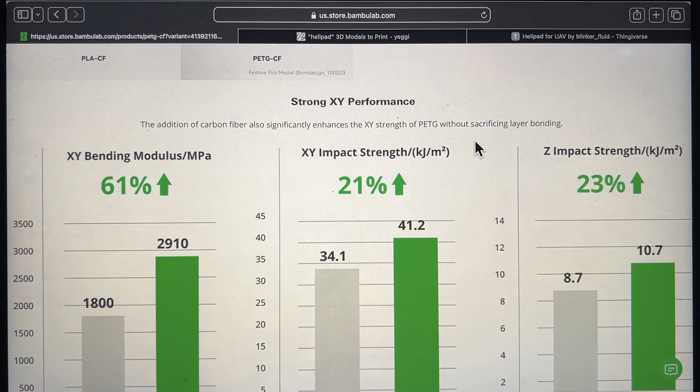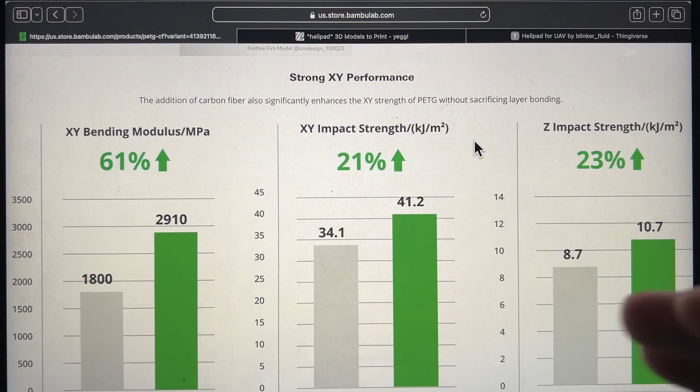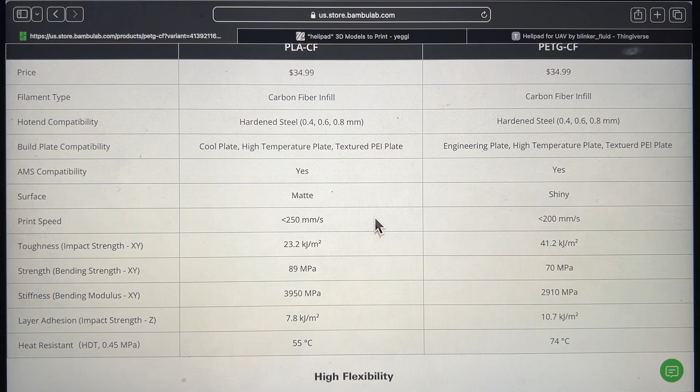So this part right here, they're just telling you the difference between PLA, carbon fiber, and PETG. You can see right here, PLA does have better strength in the XY than PETG. This is even better, but I was more focused on the layer adhesion strength - impact strength is higher here, and the heat resistance is higher. So that was pretty much my deciding factor, because if you leave PLA in the car it will melt even with carbon fiber, or will deform, and PETG has a higher temperature tolerance.

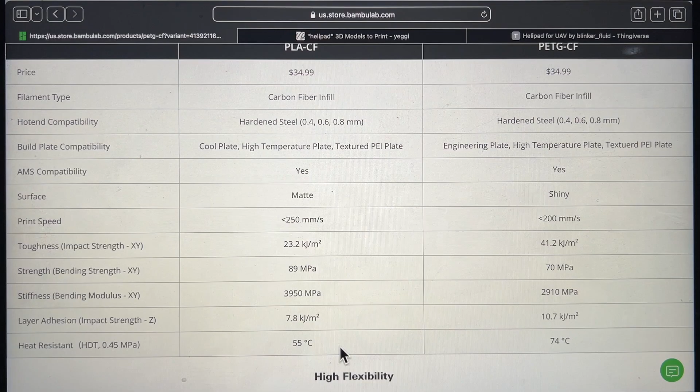And depending on your climate, it's going to dictate what kind of filament you're going to use.

Carbon fiber is very hygroscopic, so it does absorb water, and that will degrade the strength of your print if you do not get that water out. So use a dryer or an oven, or you can use a 3D printer that has a dryer like Bambu does. You can pretty much put it in the oven itself and just dry it out.

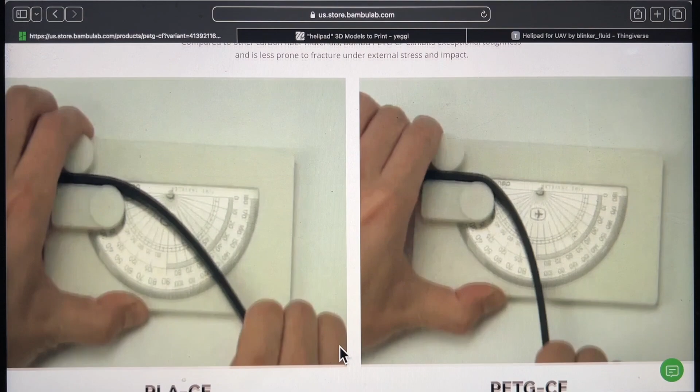So this is just testing the flexibility that they do, shows that right there. The requirements are hardened steel, that's what Bambu recommends. So you can do different types of millimeter nozzles. Here's their colors, and the RFID - this is actually really, I like this idea.

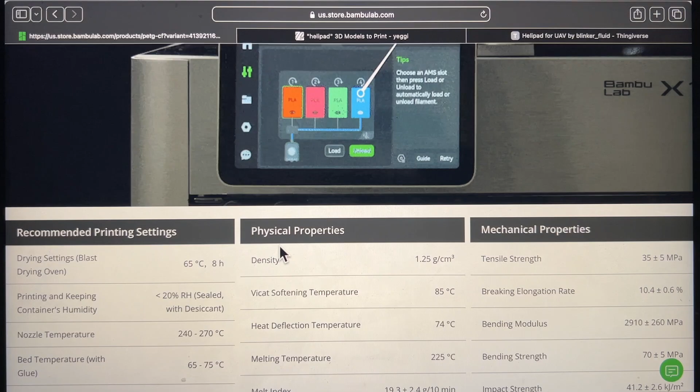I hope other companies do this, but this actually pretty much gives you all the information of that filament, and it gives you the pre-settings that they test in the facility that gave them a lot of successful prints. You can always tweak those settings for your own setup, so just keep that in mind. It's just a good starting base, which will give you a high success rate in a lot of your prints, and you don't have to try to figure out what's going on with the heat, flow rate, and all that.

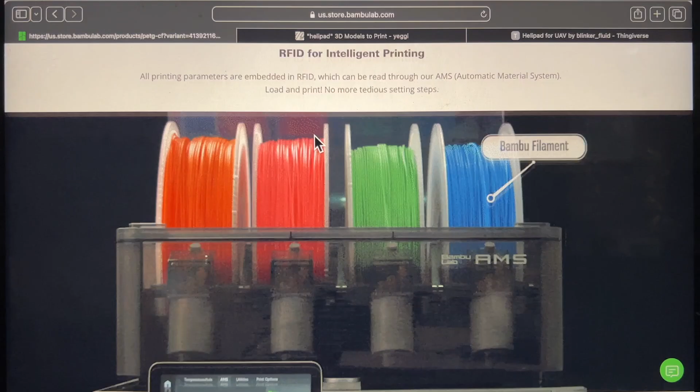Like I said earlier, you got to dry it, watch the temperature range, and print speeds, and this is all fed into that RFID. But for me, I tweaked it a little bit on my slicer. So without further ado, let's go to the slicer, and we'll send this print to the printer.

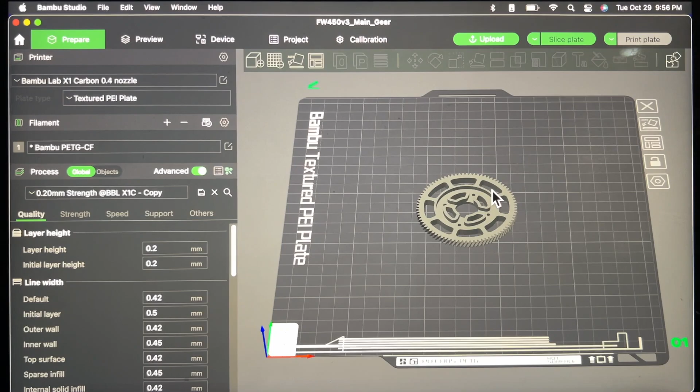Okay, so we are in the slicer. I'm not going to go fully in detail on this - there are other people out there that have explained this whole program better than I ever could, so I will defer to that. I'm just going to show you what kind of settings I like to use. These are just my personal preference.

So when you upload the file, that's for free. It does have a lot of parameters already set for you, and it gives a description of what you need to do if your printer doesn't fill that information in.

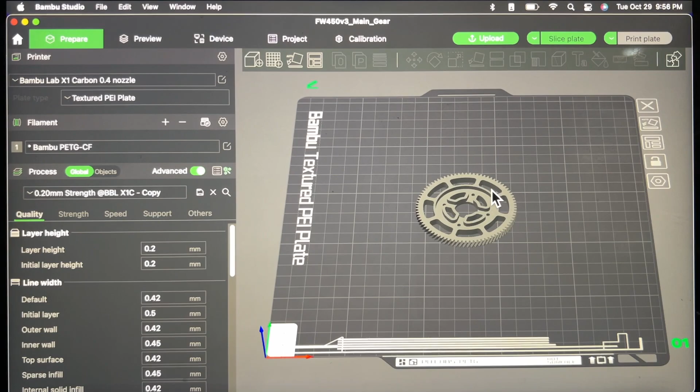One of the requirements is to do the strength, the infill. So we go to strength - your infill density is how much is pretty much being printed inside. I'm going to slice and show you. He says 50%, so that's where I'm going to start, is 50%. The higher the infill density is, the stronger your material is going to be.

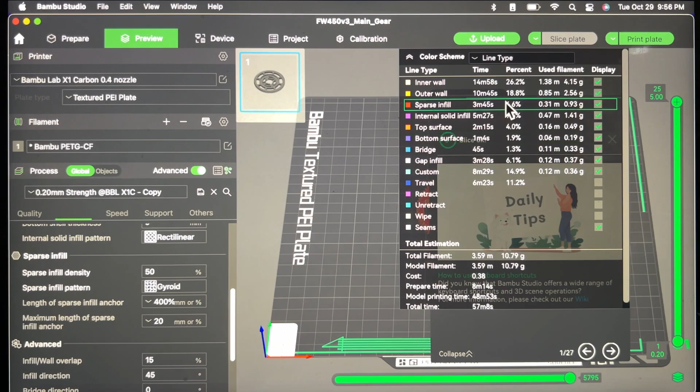Usually in the 3D print world, we don't really go above 15 to 20, because most prints already have a lot of strength. So if I slice it and zoom in, this is the infill right here - this is what's going to give it strength.

Also your pattern is going to make a difference. Usually they have this rectilinear pattern. I like gyroid because it's used for things like printing brakes and all that stuff, and it has increased strength, but it also does a good job at reducing heat. So that's what I like about gyroid.

I have never had an issue with it. In all my print files, I always select this. I think it's just great. Now, that's just personal preference - you may have a different one, so it's totally up to you.

Now the wall thickness - usually the default is 2. I just bump it up to 3, and that's just your outer wall, and it kind of gives this part a little bit more strength, because I don't want it to break off if it's weak. So that's why I increase this.

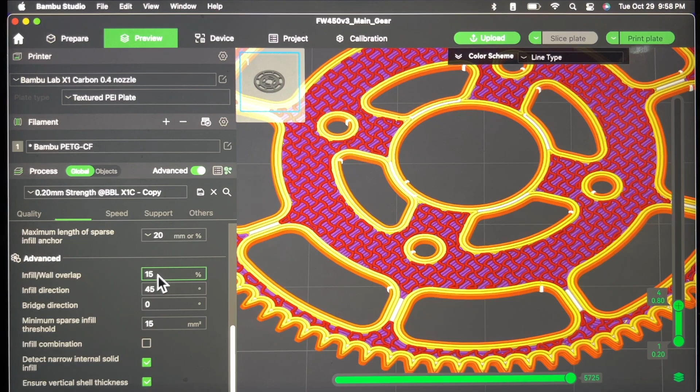And that is pretty much it, that's pretty much what I've changed. The speed, the RFID is going to determine that, but me personally, I just reduce every speed down. I think I was basing that off of ASA, because with ASA you kind of want to print slowly, and it doesn't hurt. So just keep that in mind.

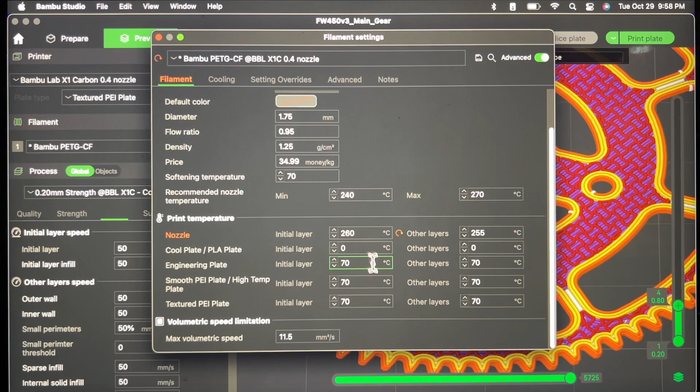Since it is a Bambu filament with that RFID chip, it reads everything - it has your flow rate, tells you your diameter, nozzle temperature, cooling, cool plate, all of the information you need. This I'm not going to mess with. Your fan is at 0, so it knows it doesn't need to cool this off, and that's what I want.

Okay, so when that's all said and done, you got all your settings. You just go to print, and then you have your printer, and then you just say, hey, I'm going to turn this off. I'm going to show you this.

So with any carbon fiber, it's going to tell you, hey, this is very brittle, and it could get jammed up in your AMS. It is AMS compatible, just keep that in mind. You might have to check, because some filaments will not be compatible. Just keep that in mind.

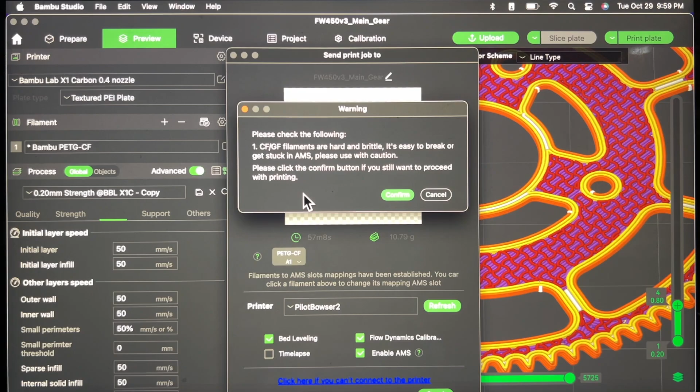And then you just hit confirm, and then you just send it to the printer. So without further ado, I'm going to send this to the printer, and we're going to review the part after it's done.

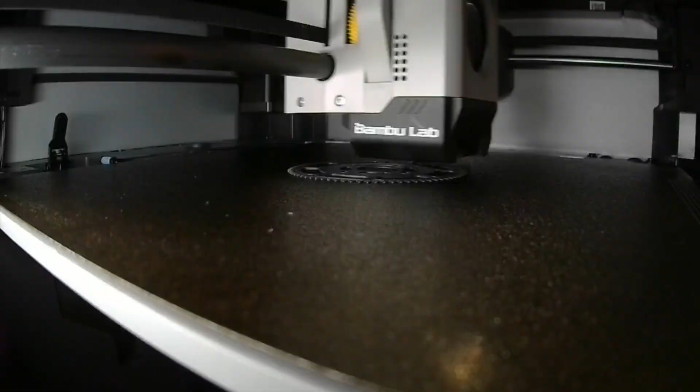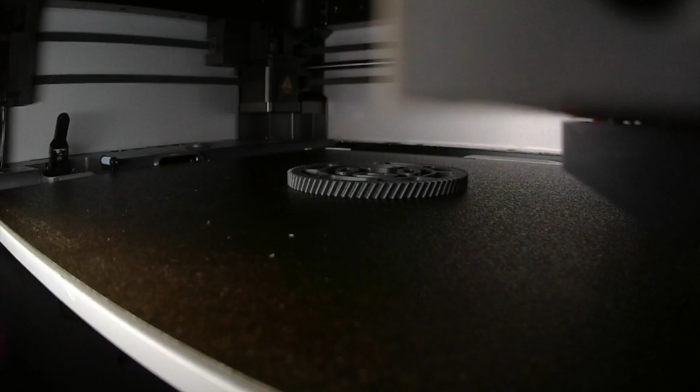Hey guys, welcome back. The gear is finally finished and it looks great. Now there are a couple tiny little issues I noticed on the gear. It just didn't fill in on certain layers, but I'm actually okay with that.

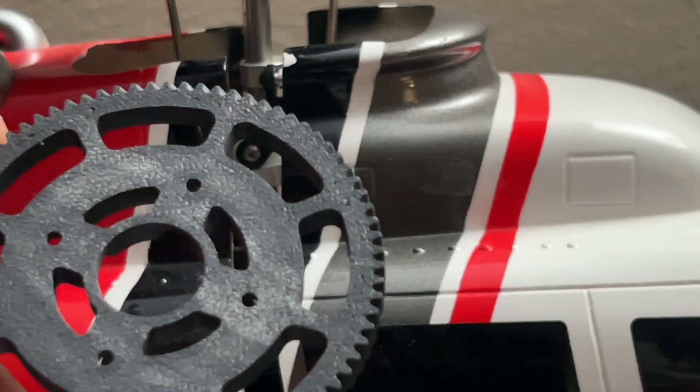I did print a second one and it kind of has the same issue, so that could just be a temperature issue, which I could fix by increasing the temperature or the flow rate to see if I can fill those gaps in. But overall...

That's the only issue I've seen in this gear. Even the metal piece fits in perfectly, and I feel confident going to the testing phase.

Also, the reason we put 50% infill is to give it more strength if something is a little off. And I would say your first layer is always going to be the most important layer, because that's going to determine a success or a failure in your print.

And I know there are some other, a lot more experienced 3D printers out there that may agree or disagree with me on that one, and that's fine, but that's just from my experience.

And then if I do the bend test, see, it comes back, gives a little flex, so it does have a lot of strength. And the reason I printed out two is just in case this one broke.

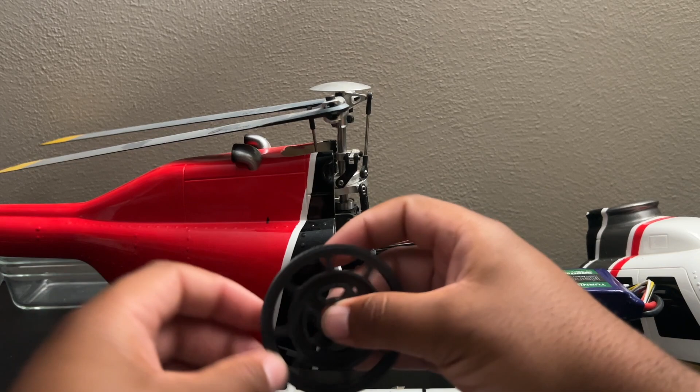This one right here is just plain ASA filament. It's kind of like ABS, and I think this might be the closest material to the main gear, the original gear Flywing produces, because usually a lot of plastics are made in ABS. But I can't confirm that from Flywing, that's something I have to ask, or if they comment on this, they can tell you.

Overall, lost my train of thought, but it's good, I like it.

I'm going to test it on the Bell 206, because out of all my helicopters it has hardly any issues. It also will be able to test the heat, because there are no air intakes, the windows aren't cut out or anything, so it's all trapped in there and it's going to produce a little bit more heat, including the frictional heat, which I want to test to make sure this piece does not warp at all.

So that is the test, and hopefully we can fly this for maybe a couple flights. If it passes with no issues, no plastic remnants like shavings or anything on the metal of the gear or the motor side, we can say hey, this is a very good substitute. The carbon fiber actually does help and gives it strength, which we saw on the computer with their impact and all their little testing. So stay tuned for that video.